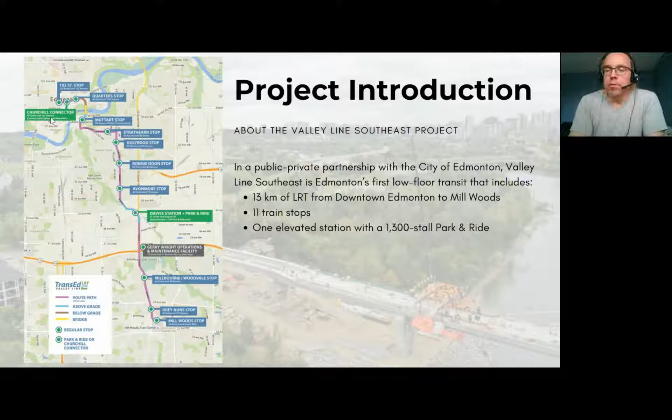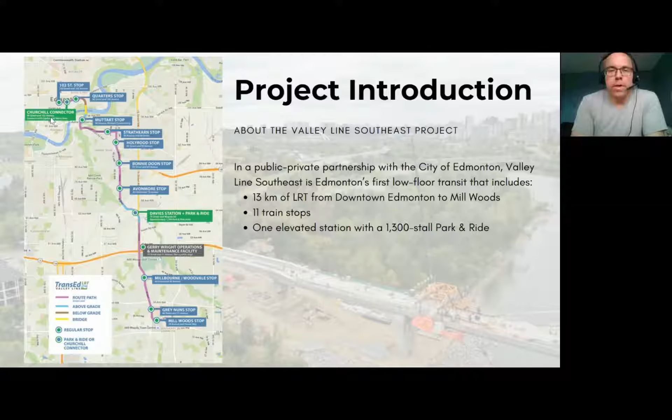The other one up at the top of the map in green is the Churchill Connector, which will be the connection to the Capital Line and the Metro Line through a new building we're constructing in Churchill Square. That building houses stairs, elevators, and escalators for that connection. This is a public-private partnership, a P3 project, with the City of Edmonton, and we're very proud to be partnered with the city. TransEd itself is made up of 4 companies: Bechtel, EllisDon, Alstom (formerly Bombardier), and Fengate.

Today's presentation covers 3 main topics, followed by a question and answer session. I'll take you through a construction update, starting with a broad overview of where things are along the entire alignment, then focus more on the area in the south in Mill Woods. I'll turn it over to Jan, who will walk you through the train testing and commissioning activities that have begun, especially in the south, including the step-by-step process to get trains fully tested and running at top condition.

Then we'll turn it over to Isabel, who will take you through safety messaging and educate you on unique aspects of this low floor train system, helping you interact safely with the train and share that information with friends and family as we educate the general public. Then we'll have the question and answer session. Please ask questions through the online text ability as we go through the presentation. We'll save them for the end and do our best to answer them, but if there's more clarification needed, we'll address it then.

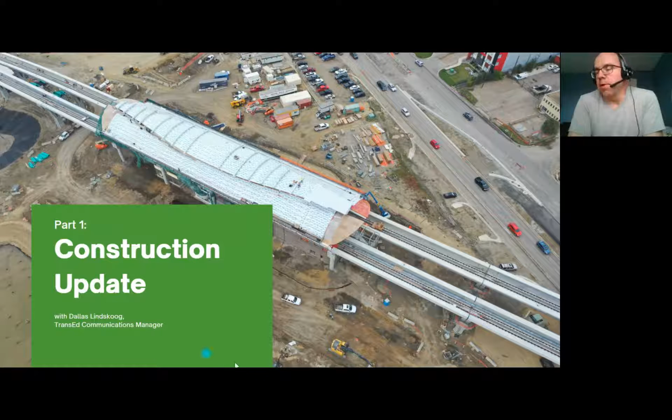So with that, I'll dive into the construction update, starting with Davies Station. This is a picture from above, you can see the station is in... let me go back one. I think I have more pictures coming up, but I'll come back to Davies Station in a second.

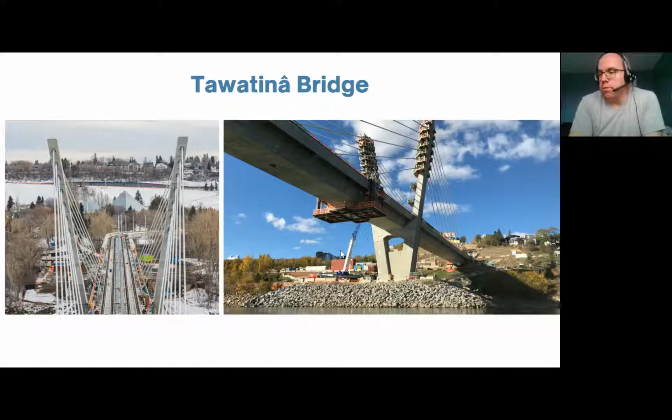On to the next slide. I think now we'll go over to the Davies Station.

We're at the point now where it's some of that last electrical and communications cable termination type activities going on.

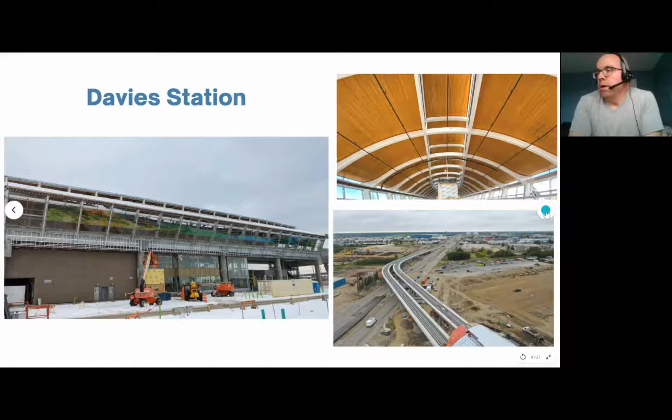Just want to point out, if you haven't heard, these shelters along the Valley Line Southeast are heated, which is unique to LRT in Edmonton — the first heated shelters of their kind. Really proud to be able to offer that to Edmontonians as well.

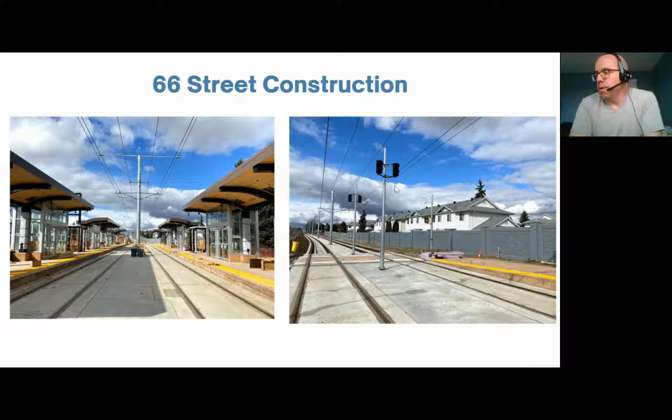One final thing to point out, because it will become more relevant as we move forward, in the picture on the right you can see some of the LRT train signals. I just want to point out the difference — we'll do our best as we're talking about some of the safety aspects today and the signals to distinguish between train signals as opposed to traffic signals. It's important to keep that distinct in your mind when we're talking about that stuff. But I'll let Jan and Isabel talk about that in their sections.

A couple other things to note before we move off of this slide. Actually, no, go ahead.

Onto roadworks — potholes are a favorite challenge for us this time of year. We are responsible for road maintenance along the entire 13 kilometers, which includes snow removal and potholes. This time of year, as I'm sure you've heard in the news and seen driving on the streets, there are lots of potholes.

Some other things to point out here in downtown are signal timings. There have been concerns raised and brought forward to TransEd about signal timings along the intersections at 66th Street, specifically 38th Avenue and 34th Avenue, where most of the concern is coming from. It's important to understand that as we do testing and commissioning, these signals aren't necessarily in their final configuration from a phasing and detection standpoint.

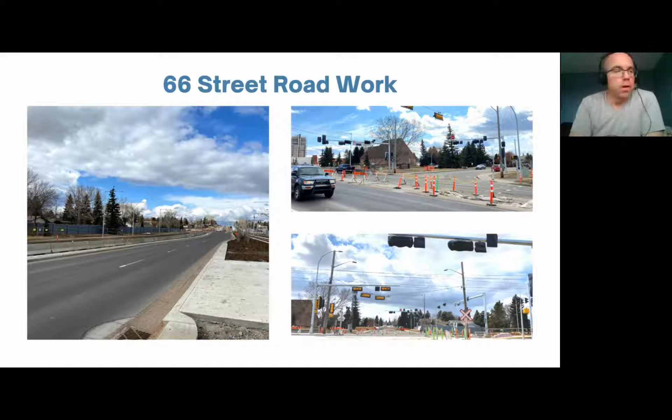I want to talk about landscaping briefly. We're installing a lot of it along the alignment, and it's one of the best features that really shows completion and brings the beautification to life. Our landscaping architects worked in conjunction with the city to make sure it looks good in the summer but also in the winter. You'll see that as the vegetation develops more, with different colors worked into the leaves and foliage.

The landscaping in Area 6, which is what we call 66th Street, is basically complete. There are a couple things to do around the landscaping on the west side of the roadway, but the bulk of the landscaping and planting beds on the east side of 66th Street adjacent to the track is now complete. We'll keep an eye on that through the summer to make sure the plants establish well, and replace them if they don't. We're expecting lots of growth this summer. There are 10,000 trees along the entire alignment being planted, over 85,000 shrubs, and roughly almost 22,000 square meters of seeded and sodded areas—a tremendous amount of landscaping ongoing.

I touched on the River Valley focus for naturalization and reforestation—that's a big part of our landscaping this year as well.

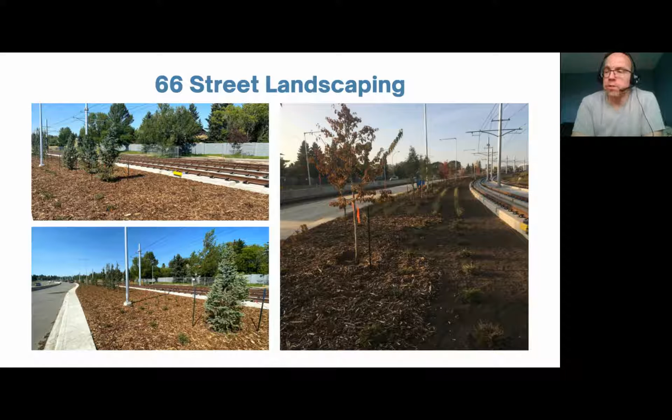All right, let's go to the next slide. I want to talk a little bit about public art along the alignment.

The next one I want to show you is the Grey Nuns and the Millbourne/Woodvale stops. You can see a little bit of a different style of art here. Some of our shelters have art and sculptures mounted to the roof. Starting with the Grey Nuns, these are sculptures that will be installed and reflect the diversity of the Millwoods community surrounding the Grey Nuns Hospital.

The artist in this case is Karen Hofat Lee, a Canadian visual artist and designer who works primarily in 2- and 3-dimensional media. She's created bands of motifs inspired by cultural textiles and patterns in this case.

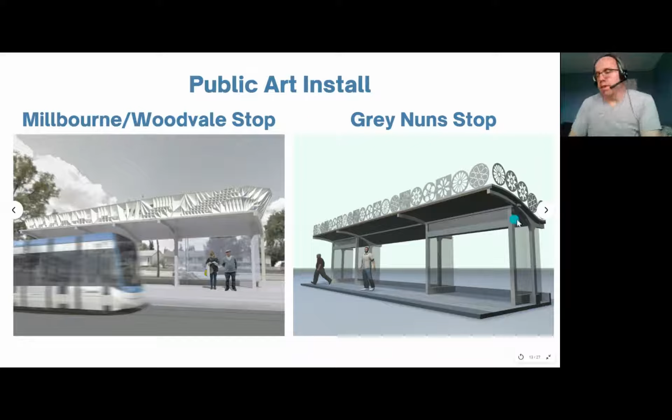I personally think it's fascinating to see the art along the alignment, and I encourage you to take a look at the Edmonton Arts Council website, where you can see all the different public art being installed along the alignment. With that, I'm going to turn it over to Jan to take you through some of the train testing and commissioning. I think you'll find this really interesting—you're going to get some good pictures of the trains and a better understanding of what it takes to test the hundreds and hundreds of kilometers of cable and thousands of connections that Jan's going to talk about. Over to you, Jan.

And there I am. So yes, I'm going to talk—and I can talk forever—about those trains and the amazing electronics, cables, safety features, and top-notch devices and options that you have on them.

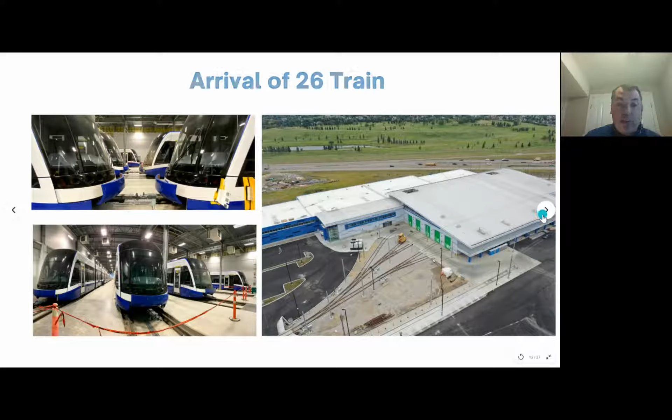Talking about coupling the trains, if we were to couple all trains together, the length of that big train would be more than 1 kilometer. It would take you more than 13 minutes to walk from one end to the other with all the LRVs that are in Edmonton right now, which you'll see on the alignment on 66th Street, because we are starting the testing and commissioning.

So overhead catenary system, OCS—I might refer to it as OCS. I apologize in advance for all the acronyms we use; we are deeply into the project, and I will try not to use many of those. The OCS system is what is providing the power to the trains. OCS stands for Overhead Catenary System.

Those are the cables that you see on the poles. They are strung on the OCS catenary poles. There are 530 poles on the alignment, all erected, and on those poles we have very heavy copper cables that are conducting and transmitting 750 DC volt power to the trains.

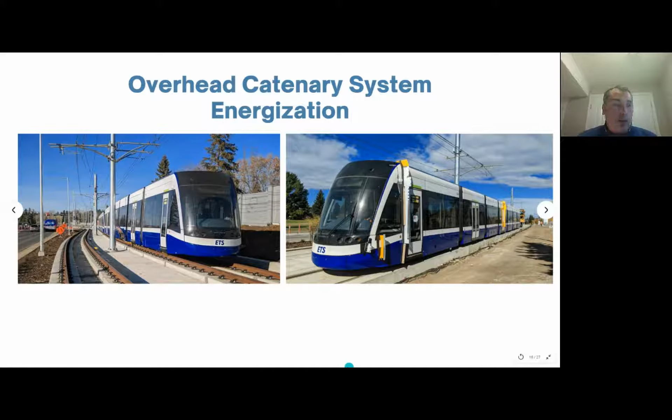So Isabel will talk about safety shortly after. Maybe you can go to the next slide, Isabel.

So train testing, that's what you are seeing right now on 66th Street. Some trains are moving, some are not moving. We are doing what we call static and dynamic testing of the train. Bear in mind, those trains have all already been tested completely out of the factory, because we do have a test track in our factory in Kingston. So they have all been running and they're working fine.

But we still need to conduct a whole lot of testing and commissioning. To understand the scale, there are more than 700 kilometers of cables along this alignment, and I'm not even talking about the lighting or the traffic. Remember, Dallas made the distinction between train traffic and train signaling versus traffic signaling—I'm not considering the traffic signaling, just the system of the train running. So 700 kilometers means that every cross section of the alignment has 50 to 60 cables everywhere. It's not just the 6 or 7 cables you see on top that are the bulk of the testing and commissioning—it's all the cables you don't see in the conduits below ground.

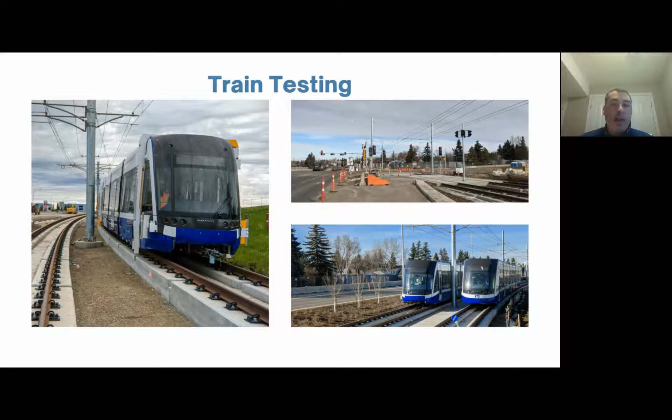So again, what you'll see there is a lot of testing and commissioning. Those trains are already very advanced trains. Those are not prototypes. We have the same type of train running in Toronto. We have 204 of them, more than 25 million kilometers on all our projects. So it's a very good product, very fitted for the difficult conditions that we may have in the winter. I mean, not this winter, if you except those 2 weeks, but the previous winters were not as sympathetic for us. So again, very good trains, and you'll see all that testing going on 66th Street.

If there's any additional slide there? No, that's yours after. Yes.

Again, my main message: always assume that those wires on top of the alignment are energized, and that will be my segue to Isabel. Thanks, Jan.

One of my favorite things about working with Jan is how his face lights up every time someone mentions trains or he sees the trains.

So I'm going to take you through a little bit of train safety here. One of the things that we would like to note is that the Valley Line Southeast LRT system is different from the high floor train system that many Edmontonians are used to. So there are a couple of features that differ from what the public might have been seeing at the different intersections, or when you're just driving or being a road user or as a pedestrian. And so we just want to take you through a little bit of key safety items here, that some will be applicable during the train testing time, and then others will also move into when the trains are actually running and commissioning.

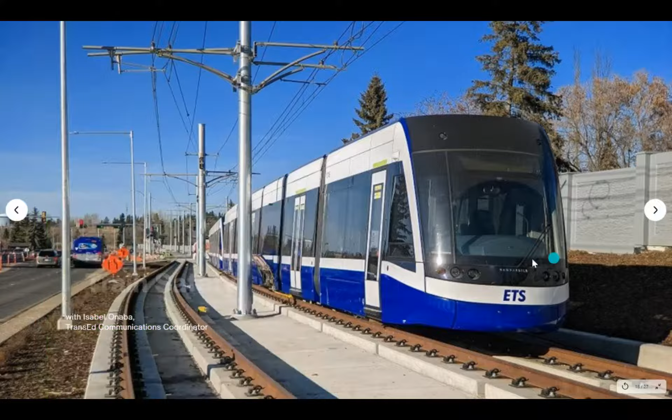So the first one is to be aware of your surroundings and other road users, and to stay alert while you're on the road. The Valley Line Southeast trains share the road with traffic. Here is a really great photograph to show an example. This is on 95th Ave. This photo was taken last year, but it shows it so well because you see the track right in the middle of the road, and then on either side, there is traffic. So this is where the cars would be going. With the high floor train system, there is a designated track that isn't actually on the road, and so that's when you'd see the gates and the bells coming in, and they come down, and then you have to stop. With this one, you will be seeing the trains as you are driving on the road. So we just ask that you be aware of your surroundings and other road users, and just stay alert while you're on the road.

The next one is do not shortcut across tracks, only cross at designated pedestrian crossings. The low floor train system does not have crossing arms, gates, bells, or fences, so there are designated pedestrian crossings for your safety. Anytime you are crossing, please only cross at the designated places. If there's a pedestrian crossing, you can press the button or wait until it's safe to cross, and it'll be safe for you, other pedestrians, and other road users.

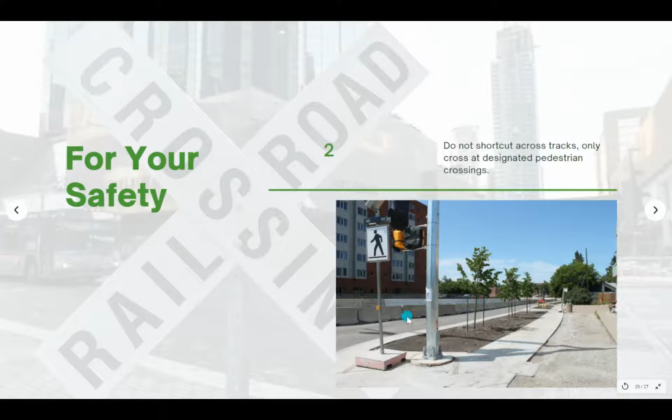The next one is to always follow the direction of construction personnel and flaggers. They are there for the safety of all road users and for the safety of our crews as well. We would like people to reach their destinations safely, and we'd love for our crews to get home to their families and friends. When they tell you to stop or they have a stop sign, or if they tell you to go, we ask that you follow their directions whether you're a pedestrian, on an electric scooter, or in a car. These construction personnel and flaggers are there for your safety, so please follow their directions whenever you see them at our active construction sites.

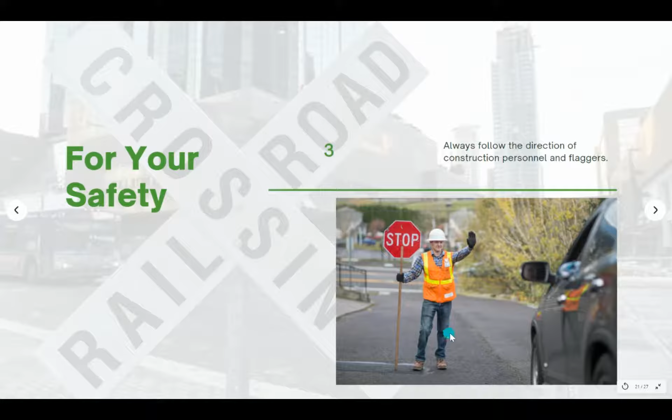The next one is to always follow traffic and pedestrian signs and signals. There are a lot of signals installed along the entire 13-kilometer alignment that aren't yet active. In some places, like somewhere on 83rd Street, there's a sign that says no left turn, and we ask that the public adheres to the signs and signals that are there. This doesn't differ from what you've been used to - when it's a green light, you go, and when they say no left turn on a red light, we ask that you wait until it's safe to go with the green light.

And the last one is to be aware that coming into contact with live overhead wires can lead to serious injury or death. We ask that you keep all high-reaching devices such as ladders, outdoor banner/light installation poles, drones, and remote-controlled planes away from the energized overhead wires. Our energized wires are at various locations along the entire 13-kilometer alignment, so for public safety, we ask that you always assume these wires are energized. Coming into contact with them is very dangerous - we say it all the time because we mean it.

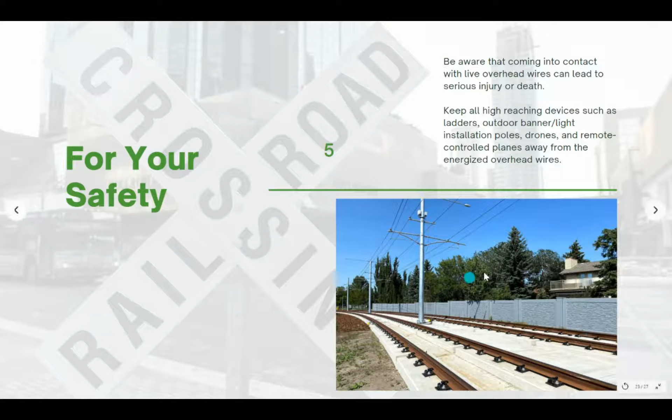If you're out walking and happen to see somebody flying a drone close to these overhead wires, we ask that you be a good neighbor and let them know these overhead wires are energized and this isn't a safe act to perform here. There are other areas much safer, away from the overhead wires, where they could do that. We just ask that you keep passing that information around to make sure everyone in the public is kept safe. Safety is something we on the project look out for with each other, and we ask that the public also looks out for each other when you're out and about in your neighborhoods.

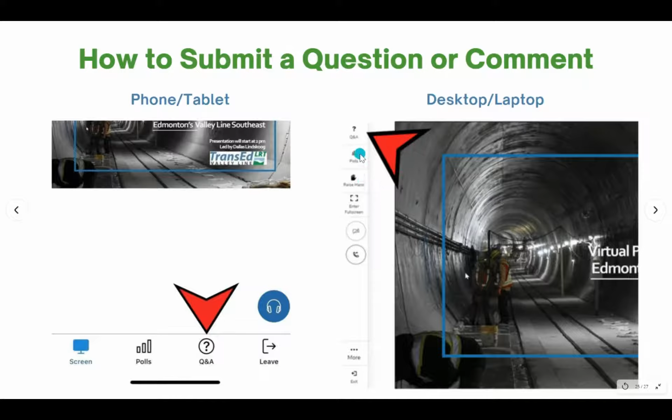That's a good question. Connor's Road right now, the reconstruction of that roadway, is effectively complete minus the top lift paving. Top lift paving will happen across the entire 13 kilometers. Probably about 10% of that is done, and that's pretty typical—we wait to do that at the very end. Connor's Hill is no different than most of the alignment.

Before that top lift paving can occur, the final concrete barrier—not actually a curb—along the south side of the roadway, or your right-hand side if you're going up Connor's Hill, adjacent to the retaining wall, is complete. On the other side of the roadway, separating the road and the track because it's on a hill, there's actually a jersey barrier, a concrete barrier, very typical to what you see along Yellowhead Trail or Whitemud Drive, that has to get constructed first.

That will happen right away early in the spring as the weather is warming up. We will cast that barrier, allow it to gain some strength, and then very shortly after that do the top lift paving on Connor's Hill. You can expect both of those activities to occur in May and June.

Awesome. I think we've made it through all the questions that have come through here. Excellent, those are some great questions. Last chance if anybody wants to quickly fire one in.

Oh, we have a thank you. And oh, one more question coming in. Yes. We're just waiting for it to finish typing.